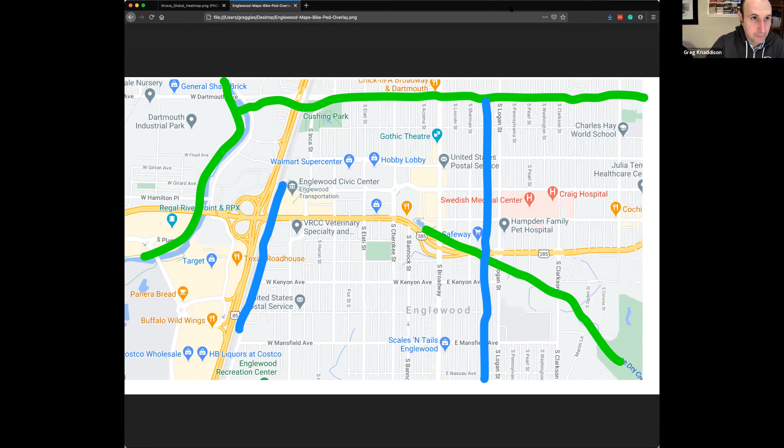I don't feel like there's a real slam dunk obvious thing we should do coming out of this, other than maybe this seems like a pretty strong casual route going diagonally across this parking lot. That's obviously private land, but if we could maybe get a commitment from that developer there, maybe we could get them to paint in a line or something that goes across there.

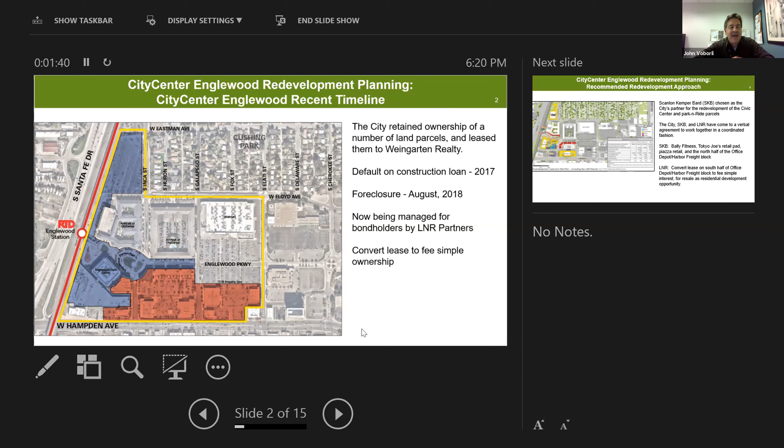So what the city has done is we've put out an RFP for the blue areas, and we chose a master developer out of Portland called SKB. And then we're also working with the servicer of the bondholders called LNR Partners. We've come up with an agreement going forward of how both the city, LNR Partners, and SKB can benefit if we work together.

So this agreement basically requires a number of different swaps. LNR Partners would give to SKB the Bally, I guess it's the 24-Hour Fitness, it used to be called Bally Fitness, the Tokyo Joe's retail pad, the Piazza retail, and the north half of the Office Depot Harbor Freight block. And in return for that, the city would allow LNR to convert their lease on the south half of the Office Depot Harbor Freight block to a fee simple interest for resale as a residential development opportunity.

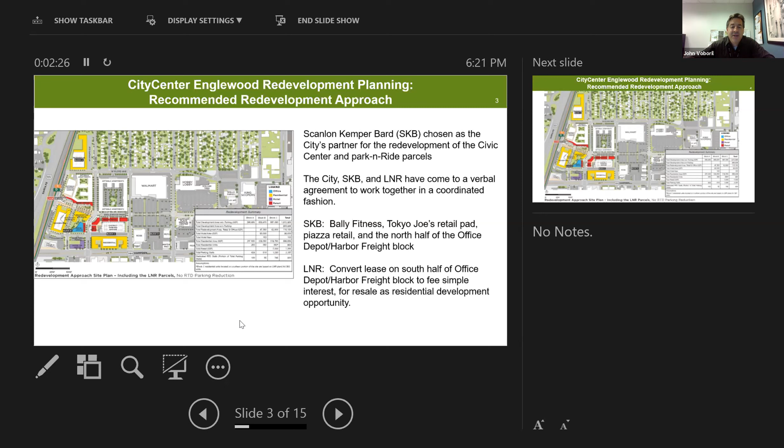This is the recommended redevelopment approach we've been working on to date. You can see that it stays west of Galapago Street. We're not dealing with the Walmart, the Ross, or Petco.

SKB's development would be heavily in this portion, where they would probably raze the Civic Center as we know it. They would create a festival street right here, and would also look to see if they could relocate the city's offices somewhere in this location as well.

LNR Partners would get this parcel and develop a 350 plus or minus unit apartment building there, so they could make a sale to another developer and recoup their losses in a much quicker fashion. This area is still being debated by SKB as to what it will look like, and there will probably be some kind of public parking facility as well.

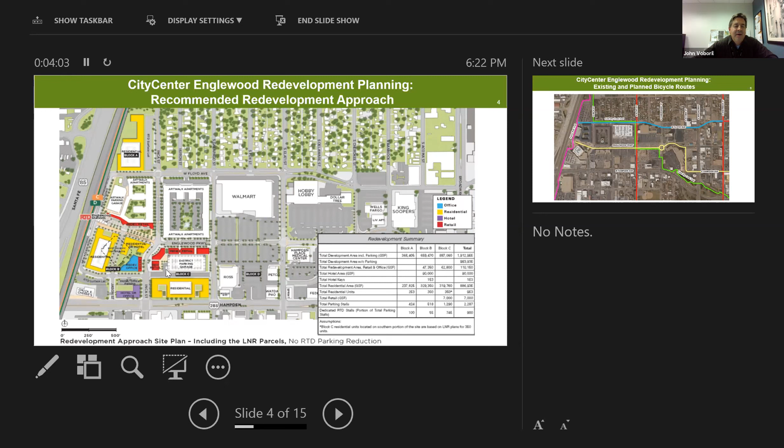In terms of bicycle planning, we haven't really done anything beyond this at this point in the process. However, I'm glad you guys brought this up, because I think we probably need to start planning for it now while we're planning for this as well. Let me go forward to this one.

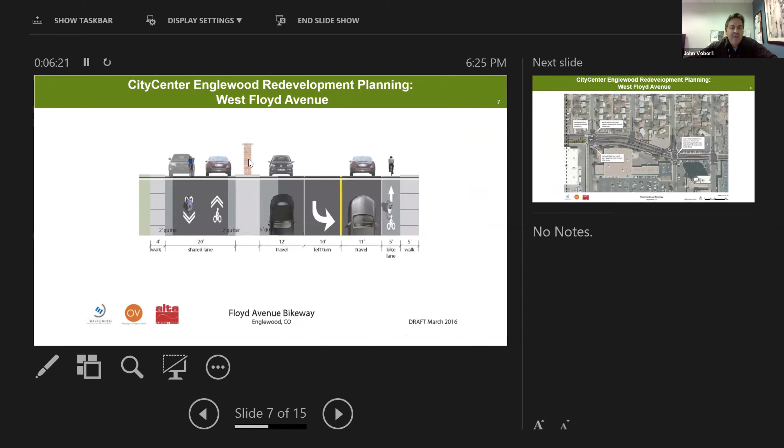Farther east, at Elati Street, you get this kind of big boulevard feel. This envisions a road diet, taking away one of those lanes and putting in a really large buffer for the bicyclists — it looks kind of like that.

One question on that last slide — on the northwest corner of Cherokee and Floyd, I see there's a little triangle inserted there, like a pedestrian island. Who owns that property on the corner, and what's its purpose? I believe the city owns that, and it's really just a leftover piece that's been concreted.

It's actually owned by EEF, the Englewood Environmental Foundation. But John's right, it's kind of a leftover piece — it must have been from when that road was put in or something. Technically it's EEF. Okay, great, thank you.

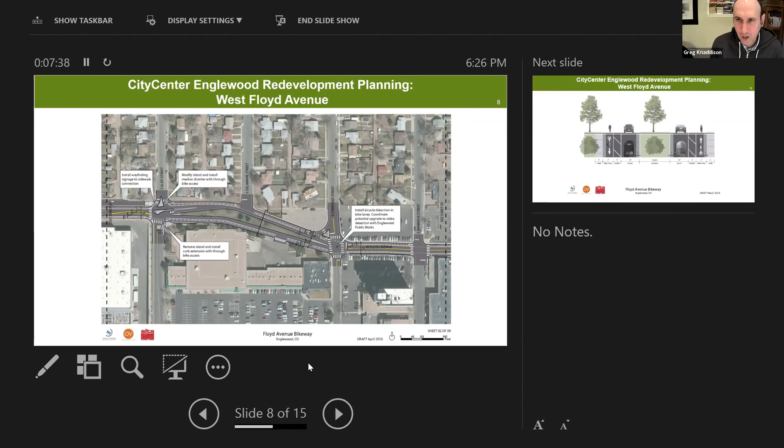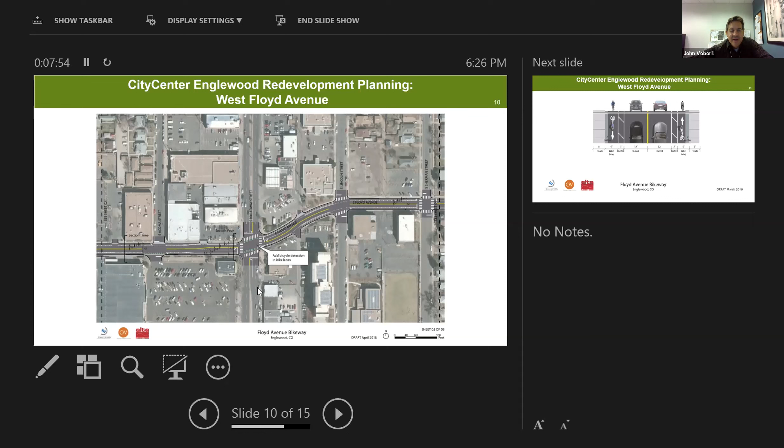As you move closer to Broadway, it becomes a little more urban and narrow, so the design changes a bit and the buffer becomes smaller.

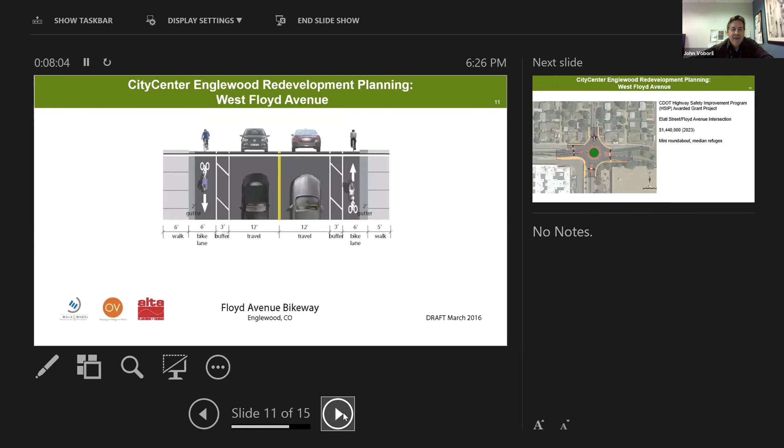I have to mention this as well — your previous traffic engineer went out and secured different sources of grant monies because he had a lot of knowledge about CDOT grant programs. One project he applied for was this Elati Street and Floyd Avenue intersection project, to redo the intersection with a roundabout in the middle and some mid-block or refuge crossings, pedestrian refuge crossings, as well.

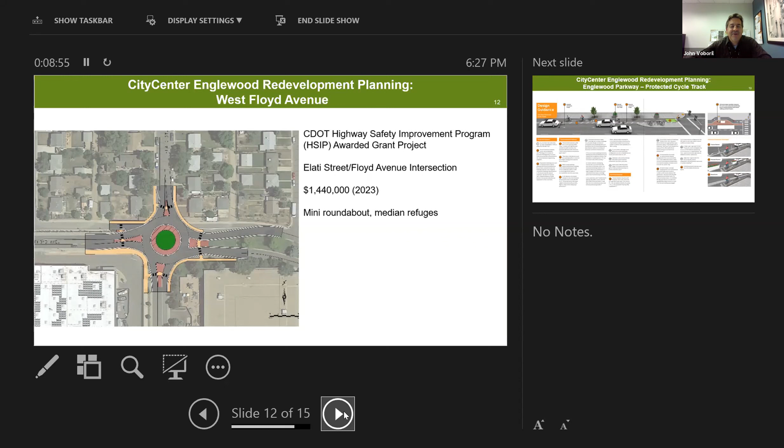$1.44 million, but it's unfortunately not scheduled, I found out, till 2023. And so I don't know how that will complicate the Floyd Avenue project or not, but we'll have to talk about that some more.

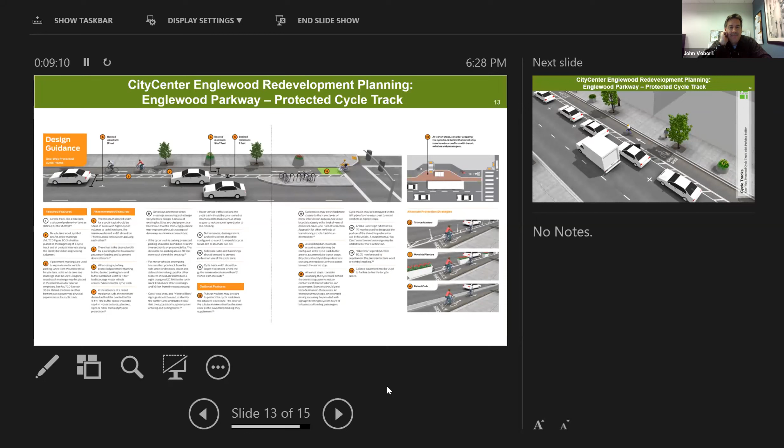And then for Englewood Parkway, the plans call for, in the master walk and wheel plan, a protected bikeway, protected cycle track. That's kind of what that looks like - a cycle track protected by a parking lane, and we would imagine it to be on both sides of the street. However, we've not done any design work at all on this. So that's something I'm wondering if maybe we should start thinking about doing this year.

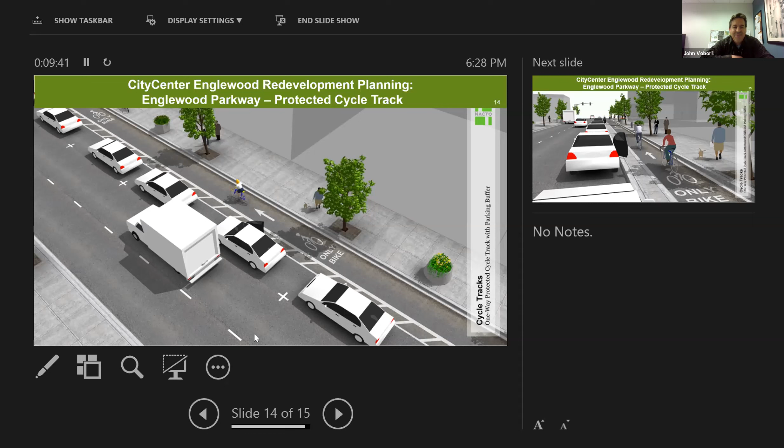And here's my final picture of what that might look like. And that's all I have for you. If you have any questions, I would be glad to take them now, or if you have comments on any of this, that'd be great too.

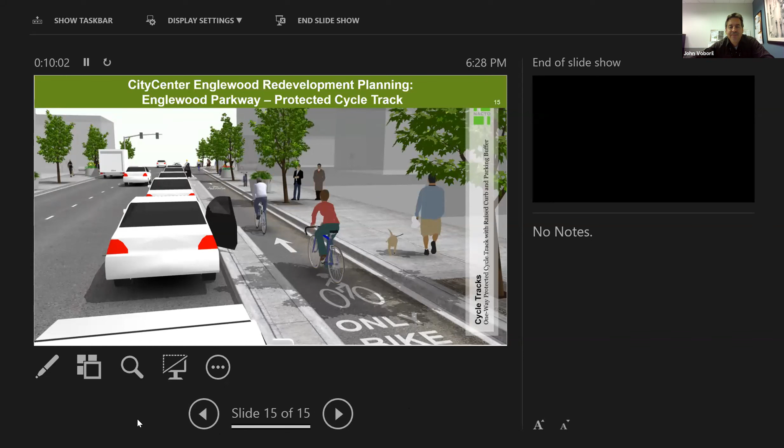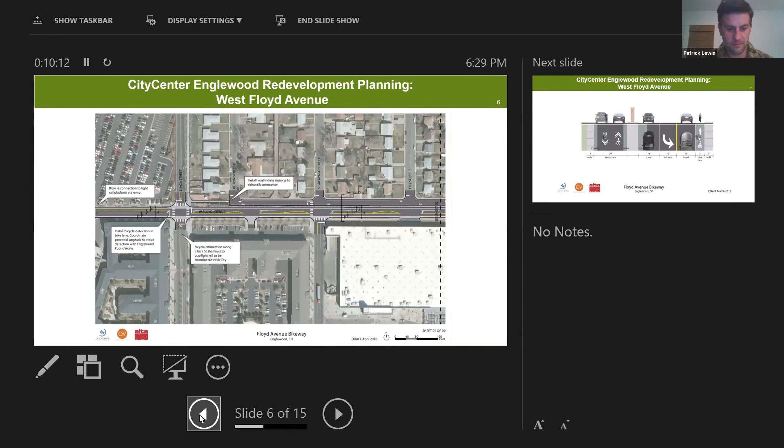John, can we go back to slide, I think 6? Or 5, maybe? Would it be feasible, when we were discussing the Dry Creek Trail, kind of where it juts up at the end of where it is now, to put a ramp where there's stairs and just loop back to Hampden Avenue, to avoid having to go through the parking lots and do all that changeover that way?

Yeah, that did occur to me - that if you made a really nice facility on Englewood Parkway that then dipped down here on Acoma and then over to Hampden, maybe that makes a lot more sense, just to connect people into that. I don't know, just a thought.

Well, I think this is a good opportunity for us to address everything in that area, being that we're ahead of this in terms of the city center development, redevelopment here. So I think the timing is just right. This could take a few ETAC meetings to discuss and sort through, or maybe evolve into a subcommittee, but even the group as a whole we can all contribute - looking at this and a few different ways to approach it. So that's the good news, that we're ahead of the curve on this, and we want to continue to work with it.